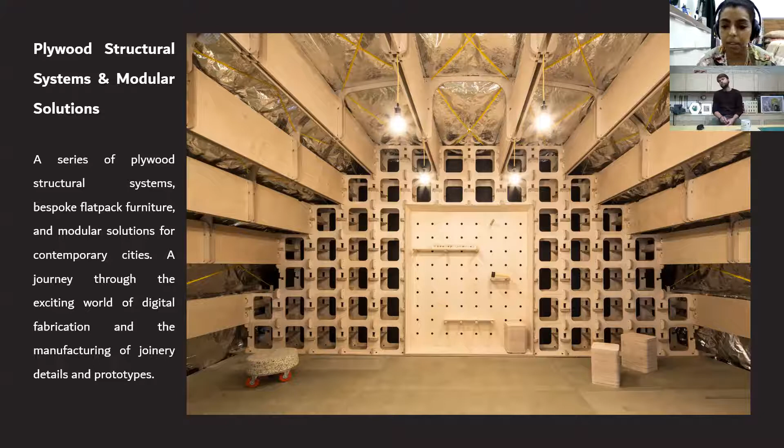To quickly introduce the lecture, which I'm pretty excited for, it will be revolving around plywood structural systems and modular solutions. A series of plywood structural systems, bespoke flat pack furniture, and modular solutions for contemporary cities. A journey through the exciting world of digital fabrication and the manufacturing of joinery details and prototypes, which I believe is very fitting for the situation that we're in, especially when we're talking about rethinking spaces within a larger space, how we can provide safer spaces, more partitions, or even spaces within open air.

A quick introduction to Tommaso. We have his partner also, Jonas, but he's hiding right now. So Tommaso, I had the chance to meet Tommaso, almost a year ago.

He's one of the founding directors of a London-based architectural design and manufacturing firm. The studio adopts a creative and hands-on approach as a strategic tool to propose design solutions to the contemporary world. Tommaso studied architecture and graduated with honors at the University of Genoa in Italy. During his career, he worked in various international architectural and multidisciplinary practices such as Ensamble Studio, Studio Seilern, probably completely butchered that,

BDP, and Allies and Morrison. So if you guys are familiar with Allies and Morrison, to the people in Amman, they're the master plan consultants who are working on Hayy al-Arfan.

He has been a lecturer and a speaker at IUAV, the Architectural Institute in Venice, Italy, Leibniz University in Germany, and Architecture Foundation in London, as well as FORMA. Some of their memorable or quite impressive projects include Minima Moralia and London Festival of Architecture, Quiubox in Milan Design Week, AIDA in Dubai Design Week, and part of the Unfolding Pavilion during the Venice Biennale of Architecture 2018. And of course, the Arches Project, which was one of the finalists at the Building of the Year Award 2020 by ArchDaily.

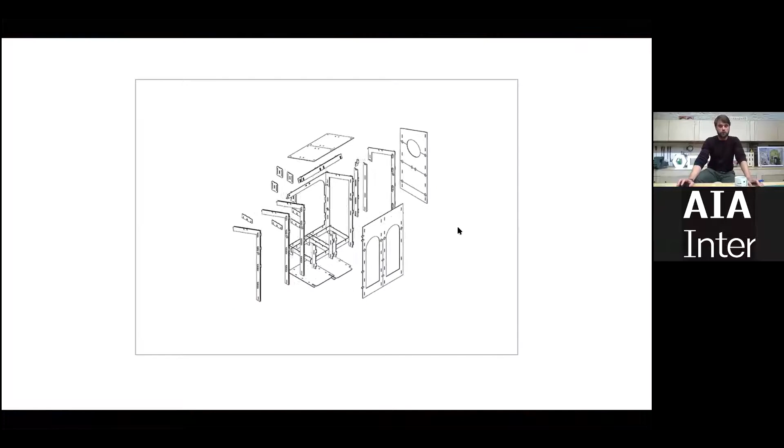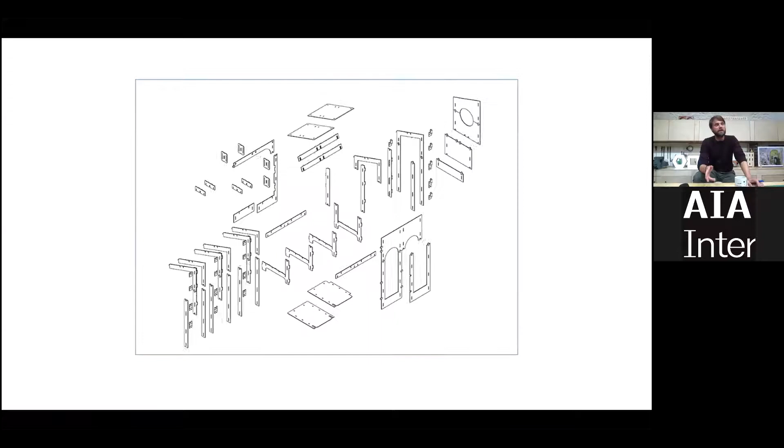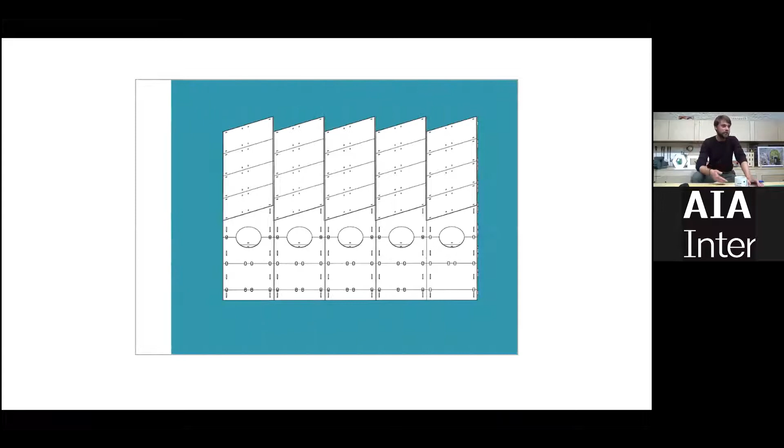You can see in the video that every single piece had to be built in 3D and tested. We did a prototype at a smaller scale, and then had to build it in Milan in just 2 days, because usually on this sort of project you don't have a long time to design, make, and test things. Everything has to happen immediately, because you have 2 days to build it up and 1 day to take it down.

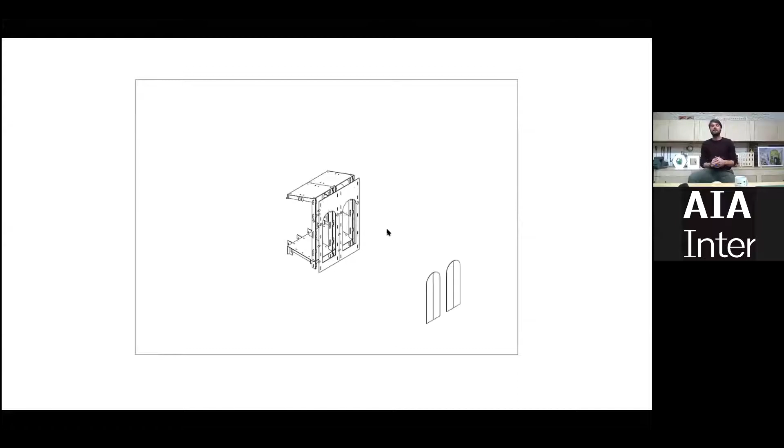So we spent time understanding the sequence of how every part was built and put together, and then we just had to improvise it there and do it for the first time at full 1-to-1 scale.

Obviously, the key to these kinds of projects is having a good team—people who are open-minded and happy to test different ways of building. We had a lot of fun. Building something like that might be a lot of work, but in the end it turns out to be faster and quicker, and it's the kind of thing that brings the team together.

So this is one of the modules of the structure you've seen in the square, and we built one inside as part of an exhibition. Again, you can see that every single joint is without screws or nails.

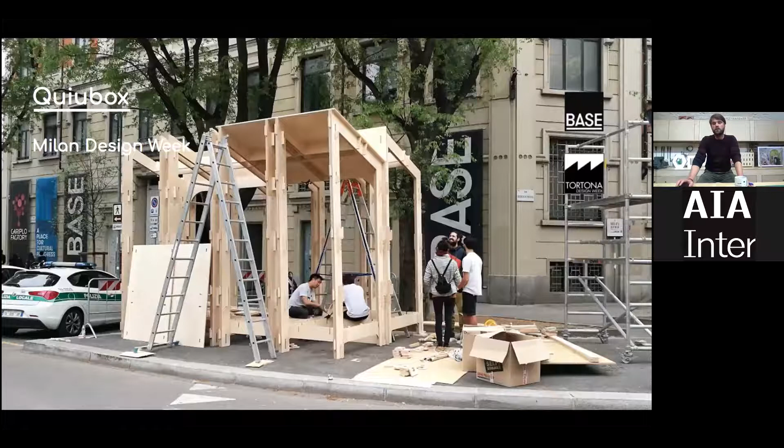It's just like pure dry joinery technique. The size of this element is 3.6 meters by 5, and it didn't have any column in the middle, so our engineer was a bit skeptical, but we convinced him we could do it. We built it with zero tolerance, meaning all the pieces had to slot in extremely tight. One of the challenges is understanding what is the right tolerance for each piece, and that's why the prototyping phase is one of the key phases of the process.

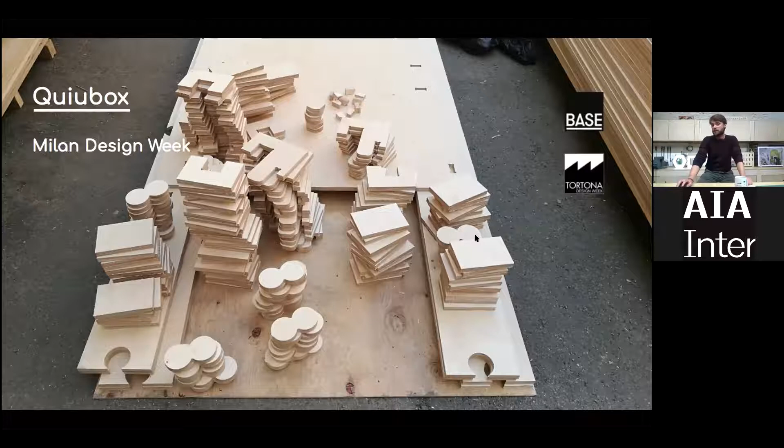You see here two different joints. The one on the left is the joint that holds the two parts of the building together, and the one on the right is the typical joint that's with a series of C shapes that kind of sandwich the structure together.

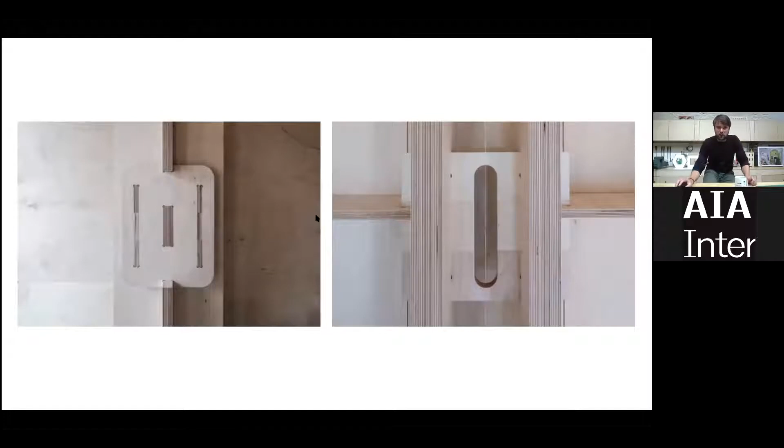Another project that I want to present today is the Arches project. It started in 2017 with a competition launched by the Mayor of London, Lambeth Council, and Meanwhile Space. Meanwhile Space is a company that operates spaces and creates affordable spaces for local startups and businesses.

The subject of this competition was basically creating a system, a kit of parts that could be easily built to retrofit arches that were not in use. In London itself, we have up to 3,000 arches that are not in use. They're not in use because they are too damp, too cold, simply not in a great state.

At the same time, you have so many other arches that are filled with laboratories, carpenters, all sorts of people that make things. So we were very happy to work on this project because we felt we were creating space for people that often struggle to have a space where to make things.

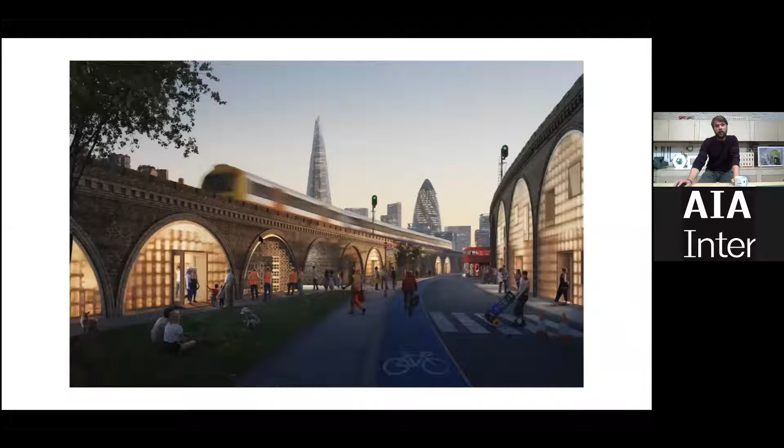The vision that we had was something like this, where all the arches were quickly infilled by our structure, and then we wanted to create space for startups, businesses, and anyone that was in need of a space where to make things or where to create.

I will show you a physical model here, actually. Let me stop the sharing of the screen for a second. I hope you see me here.

This is one of the models of the arches and the structure that we made. I'm showing you this because it's key for us to test every project not only with 3D or drawings, but also with physical models, and often one-to-one models - proper prototypes of the structure.

The key aspects of this project were that the facade had to be transparent to allow natural light to fill the space. So you can see here, yeah.

And then the structure at the back had to be something that could be easily built but also taken down and rebuilt somewhere else, because the issue we have in London is that the price of renting anything is crazy - everything costs a lot of money. So people that rent these arches often don't want to invest money to retrofit them or do any sort of work, because the lease might end in 3 months, 6 months, and then what do they do with all the money they put into creating this space?

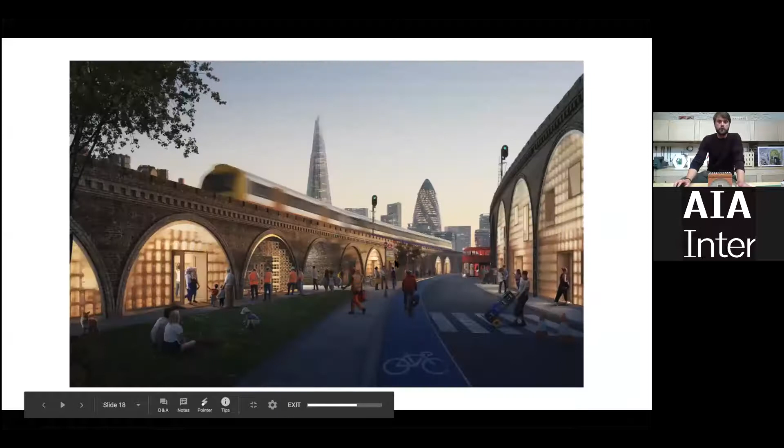Obviously, there was a bit of time that we needed to allocate to the R&D stage. You don't get these sort of structures right the first time. But we were relatively confident because we already tested the one-to-one and it worked well. But working on sites in a tight space like an arch is not easy, because you can only access the top of the structure from the inside.

So all the pieces had to be simple, easy to build, and we kind of needed to have just a few pieces. It's like building Lego here, right? So you don't want a thousand connections. You want to have 3 pieces that are so easy that you understand how to build them without really checking how this should be done.

In this case, we had the boxes that were supporting the outside wall, and then they were also creating the support for the long beams that were spanning from one side of the arch to the other.

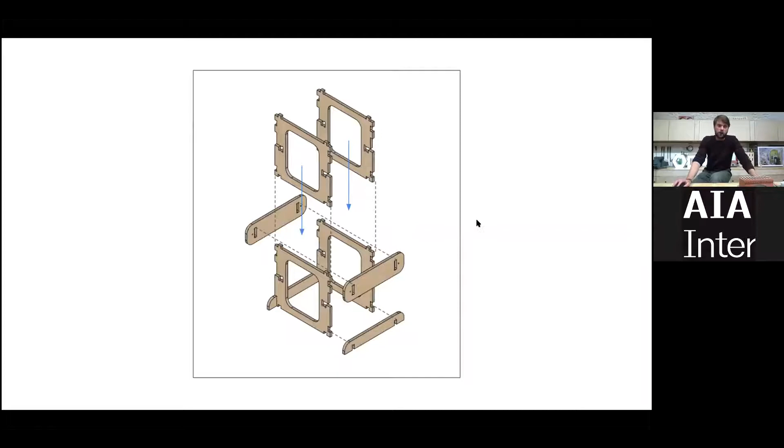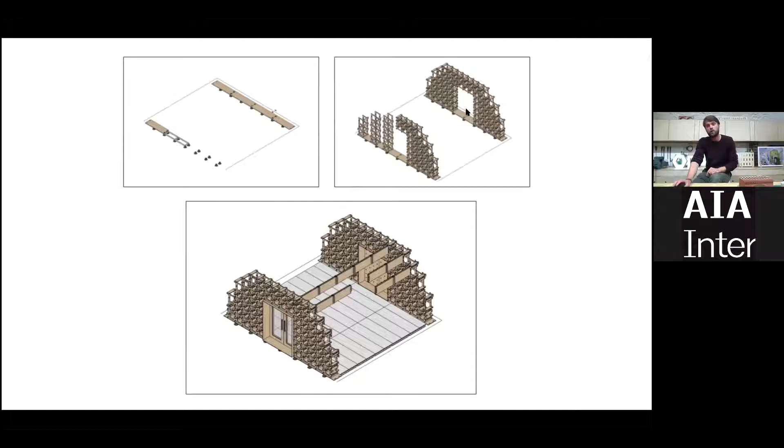So you see here a 3D model of the boxes with the system of how it has to be connected. Basically, you stack vertically a series of boxes, and they are stitched together with the connectors. And then on the 2 walls, you just need to make sure that they are perpendicular, and you connect them with long beams secured in place.

The connectors were also the point onto which we were fixing the polycarbonate wall, because obviously in London it's quite cold, or it can be cold. So we needed to make sure that the space was thermally comfortable.

So we were using quite thick polycarbonate walls fixed on the structure to allow light to fill the space, but also to create a wall that could provide quite a good U value.

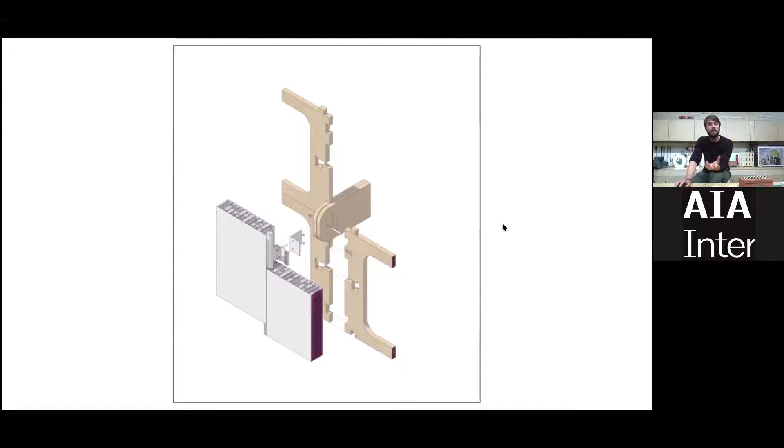After a lot of work, you really want to feel that - oh, this is going too far.

There is a video here that I want to show you, which basically follows the process of building the arch from the start. I hope it will work.

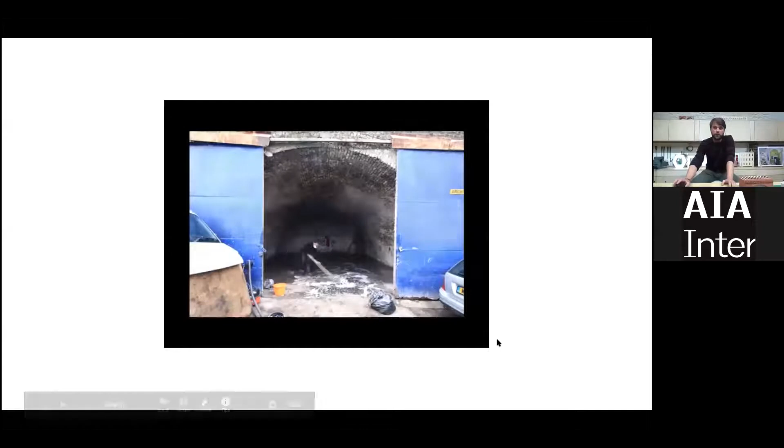I will remove the music, it's a bit too loud, but you see how we started by having to clean everything. I didn't know that after studying six years and working ten years as an architect, one day I had to do this, but that was part of the plan - you sign up for this project, you prove that you can build it, and as part of this competition we had to physically build it. You see that we are laying down the base for the arches.

The base has to be raised from the soil so there's no damp coming up. Then on top of this base we were laying all the boxes, and honestly you can build all these in a couple of hours. All the boxes are put together with just a mallet, so you don't need any special tool or anything strange.

And the structure is quite strong, so we were building the architrave by hanging it on both sides and then fixing it at the center. In the end, the structure is quite strong, and it's also flexible because everything is built with zero tolerance, but still in between pieces there is a margin of tolerance that allows this to be flexible - also if you need to push it or move it slightly on site.

These are the long beams, and then you see here the insulation going in. Obviously it was a sort of R&D process where we were trying something, and if it didn't work, we were lucky that our factory was next door, so we were building everything in another arch next door.

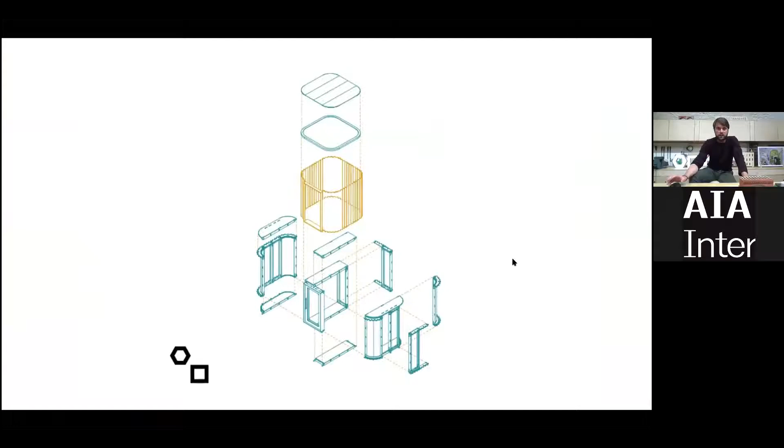We think that as an architectural practice, knowing how to make things is important, and working modular is the way the future is going. You need to create projects that can be built in a clever way and that can be used in multiple ways, building with this system that allows you to create something sustainable, but also something that can be built multiple times.

But we often stress that each customer, each client, each user of the space has to feel free and has to be able to customize this and change it. So instead of having the pegboard, you can have a mirror, you can have a finish of any kind. So in this way, architecture is not something that we dictate. We just create a system for the people to then use in the way they want.

So this is all like a flat pack system. Everything is modular. You can choose to have a window, an opening, or a solid panel, and you create your own space. Basically, you create your own room in the garden.

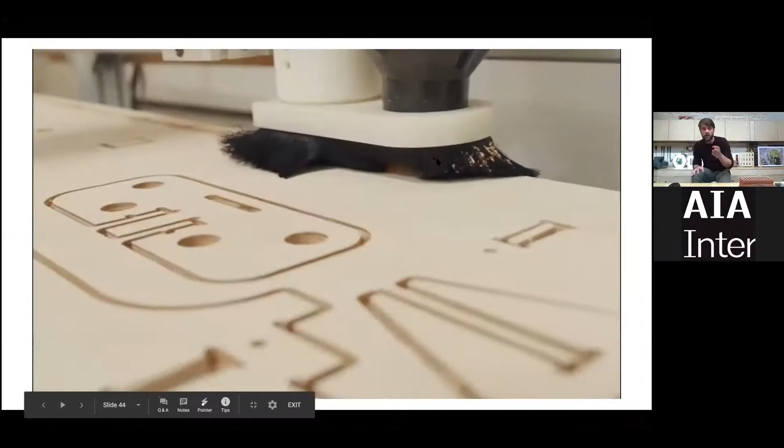I'll finish with this video as the last thing I'm going to present today. It shows the full process of how we do this. This is Jonas in the workshop. We are manufacturing pieces, and this is the corner of the structure that you can bend.

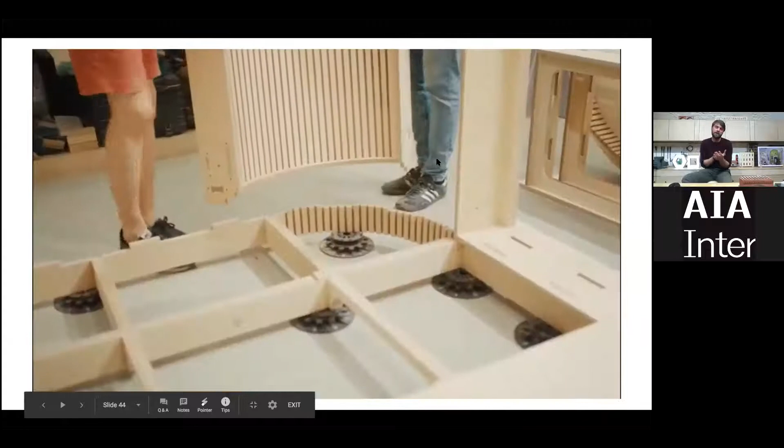So you basically cut grooves so you can bend the plywood. And then we were developing one-to-one details with the metal, with the welders, so we could design every part of this structure in detail.

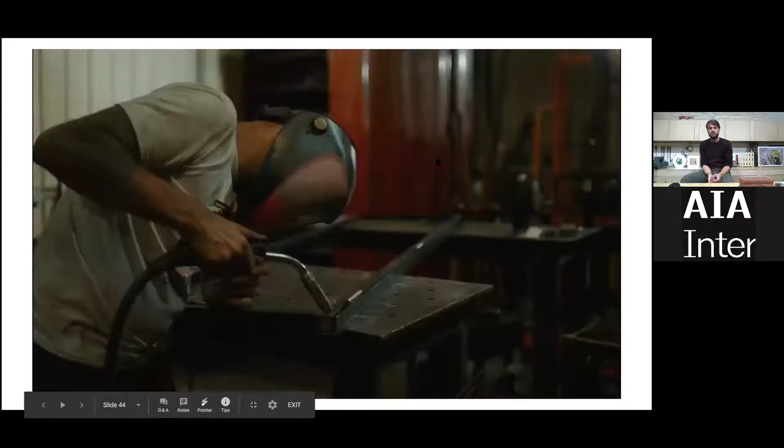So we went there, we discussed things, then we finalized details, and then we actually built the first prototypes. Everything is designed to be not too big, so you can move it inside tight spaces. London can be quite narrow—you can find flats where you have to go up and down the stairs. So every piece is not too big and not too heavy, so you can build it easily.

Then you combine them together on site by using just a mallet and an Allen key, and then you lay the external cladding, finish off with the doors and everything, and that's it. That's your space.

And at the time with COVID, it's kind of key for the well-being, for the mental health of all of us, to be able to go out and work somewhere else. You cannot just work from your living room. You need an extra space. You need something different. You need to step out.

So we thought that working on this project at this time was key to doing something useful as an architect or as a maker. And again, everything can be built by just using this and this, so anyone can do it, really.